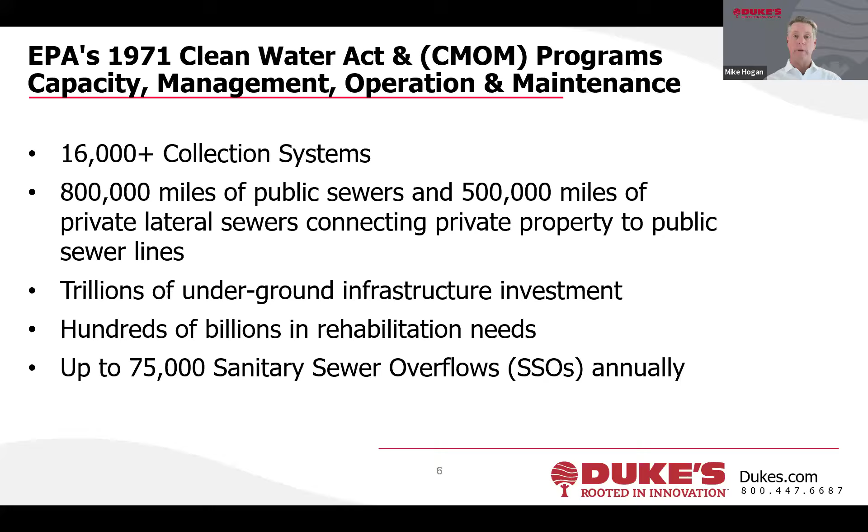And mostly, the CMOM program addresses the 75,000 sanitary sewer overflows that we experience annually in this country. And I'm going to touch on that a little bit on this next slide. And the reason why the SSOs are what the EPA and the state associations are really going after is when we have an overflow, it's a threat to our nation's public waterways and our public health. And again, prior to the 70s, our rivers and streams in this country were in dire straits, and we've reversed that. And it's because of these programs. But SSOs still happen at a rate of 75,000 a year.

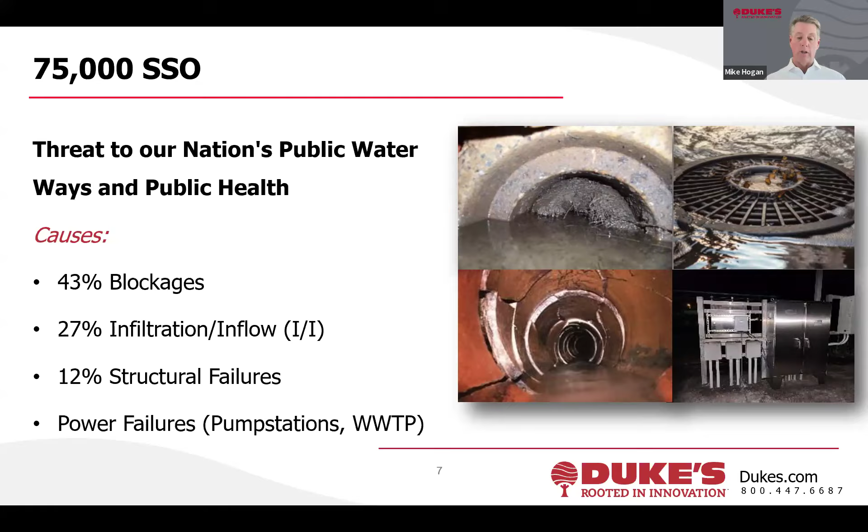And 43% of them are caused by blockages, like this slide here, where we're showing roots blocking the line. We've got 27% infiltration and inflow, groundwater and rainwater infiltrating, causing stoppages. Then there are structural failures of the pipe, where the pipe has collapsed and failed like this one. Ultimately, it may cave in and cause a blockage or an SSO. The others are power failures and some others, but we're going to key in on the 43% by blockages, and that's primarily roots and grease. Debris and collapsed pipe are a part of it, but mostly it's the grease and the roots. And this is by surveys done by the EPA.

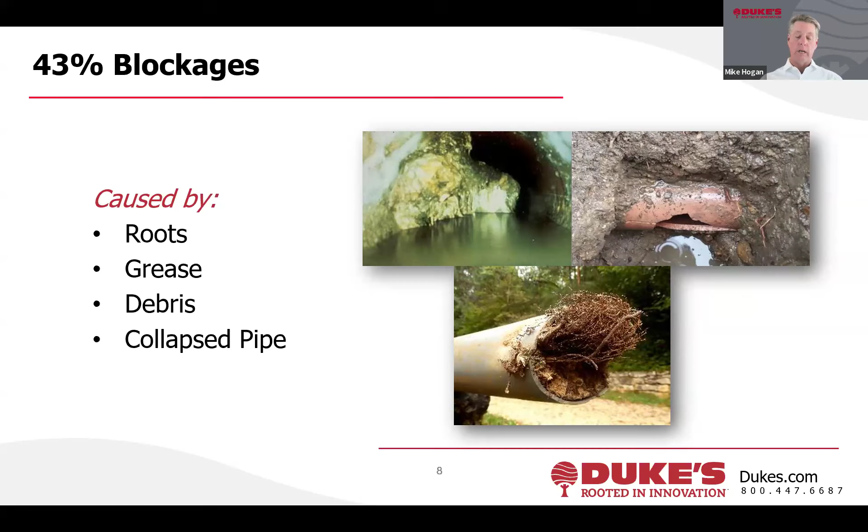Again, here we've got a massive blockage, and this blockage is built up of roots, grease, debris, everything that's collected on it. Flow's still able to get around it, but ultimately that won't be the case. We've got collapsed pipe here to the right, and down below here we're just showing how much these roots can grow once they're inside our sewers. We'll get into that a little bit more later as well.

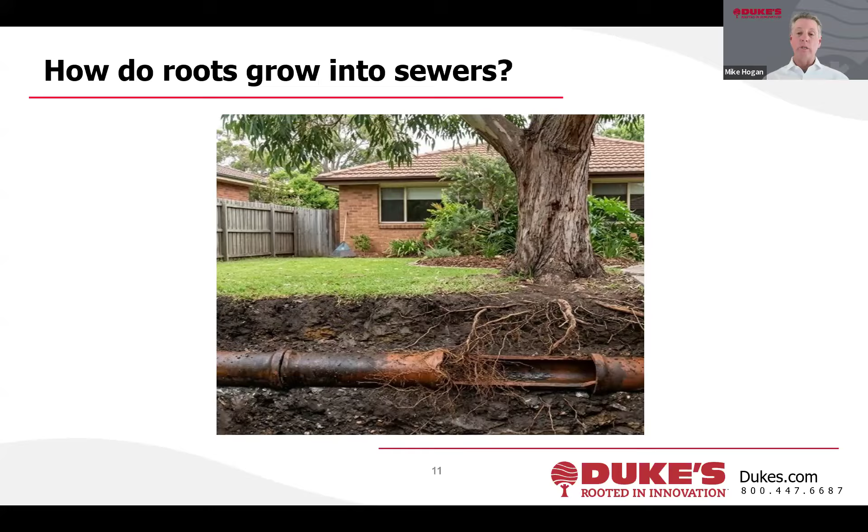Also, think about this. I introduced the idea of an anchor. Well, of course, the root is the anchor to the tree. And if we get a heavy windstorm or high wind situation, you're going to have this tree swaying. And when this tree sways, these roots move. When these roots move, they pull on this pipe, and that in itself can create openings for the roots to get into. So again, it's not what's in the pipe that's attractive to it initially, it's what's on the outside, but they always do seem to find their way to our sewer pipes.

You've got oxygen and you've got unrestricted growing space. So it's the perfect environment for roots to thrive. And as I said, you've got the compacted soils and everything that it works its way down through to get to our pipe. But once it gets in there, you've got this explosive growth that can occur because of all these benefits to the root mass.

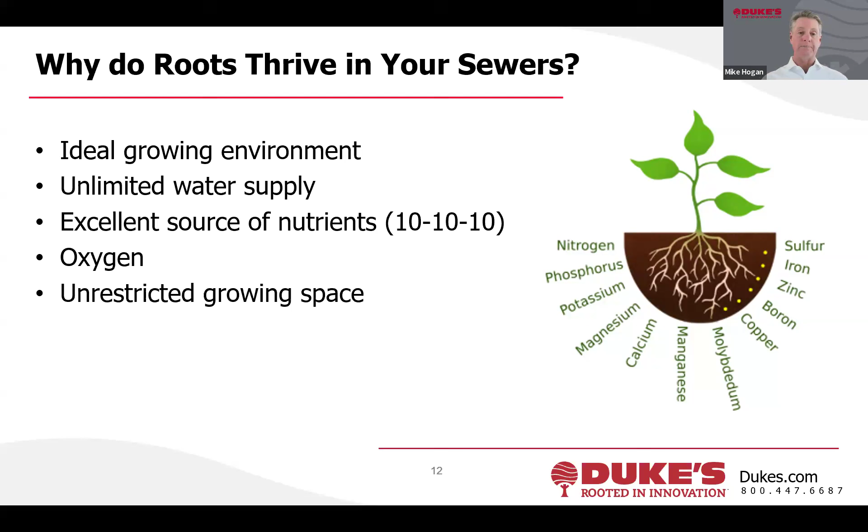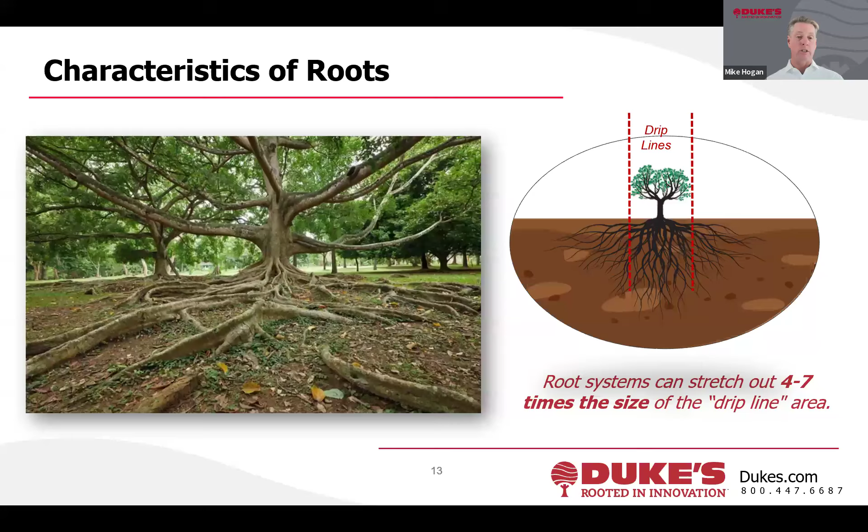So what happens is these roots grow 4 to 7 times the drip line of the tree. And in our situation where we've installed sewers down the middle of the street, we often wonder how roots get all the way out there, but this is why they get there. They're going to actively seek out the nutrients and moisture that they need for survival. Again, it's an unintended consequence of our actions, but we are contributing to the problem.

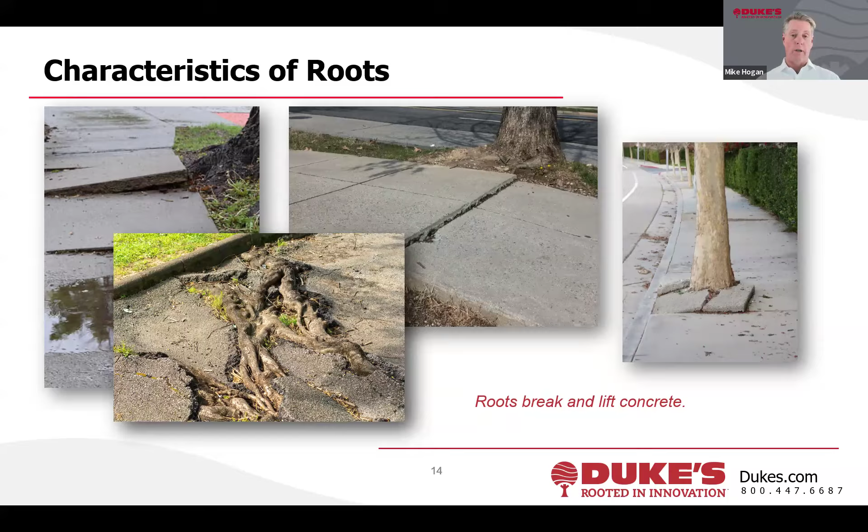Once the roots get to your sewer pipe and get through it and into it, that growth is still happening at that point of entry, and that's where the destruction happens. So whenever a council member or someone talks to me about, "Well, I don't really see what's going on down there," this is one way to point out to them what is happening.

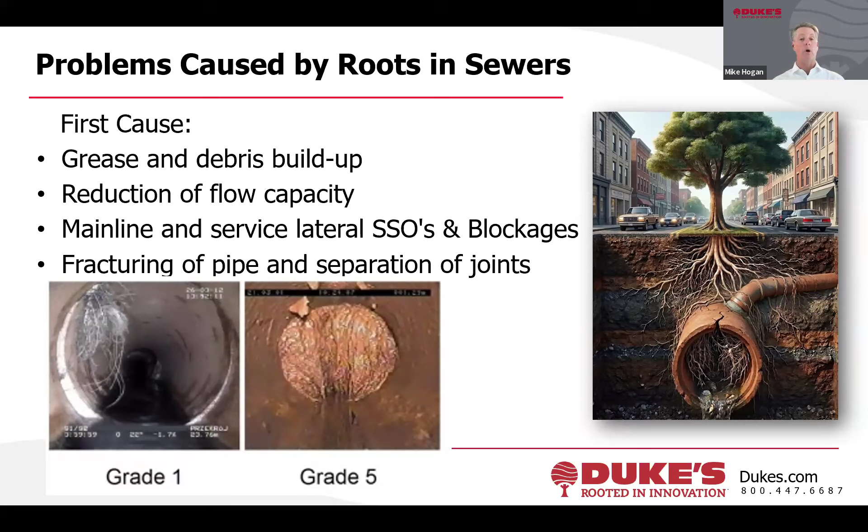And he's right. And he explained to me, sewers are designed to flow hydraulically at a certain rate to move solids through into the wastewater treatment plant. But when roots grow in the line, slow down the flow, what starts to happen? Debris starts to settle out. As that debris starts to settle out, the flow levels come up. When the flow levels come up, they get in contact with the roots. Roots aren't aquatic. They aren't growing down in the flow line.

They're up above it. But as the flows kick up and down with peak time, peak demand, stormwater entry, the roots facilitate more grease getting collected. And ultimately it becomes this big blockage. And there's very little root mass there, most probably, but it's a huge potential problem for us. So roots are the first cause for grease and debris buildup, reduction of flow capacity, ultimately leading to the SSOs and the blockages. And over here on the right, you're seeing this tree illustrating the roots growing down to our pipe. It's got into the joints, and ultimately it will crack and fracture the pipe, as I've mentioned.

So what is the role of root control as the foundation of a comprehensive preventive maintenance program? And when I talk about root control, preventive maintenance, and comprehensive preventive maintenance, comprehensive is your overall approach. Root control is just one of the tools necessary to have an effective, comprehensive program. So what are we going to do about these? What have we been doing? What are we going to do? Well, we've had mechanical methods to deal with it. We've got rehabilitation methods to deal with it. And we've got chemical, herbicidal, our particular Duke's method of dealing with roots. So there are options out there. And all of these are important and useful tools if you truly have a comprehensive program.

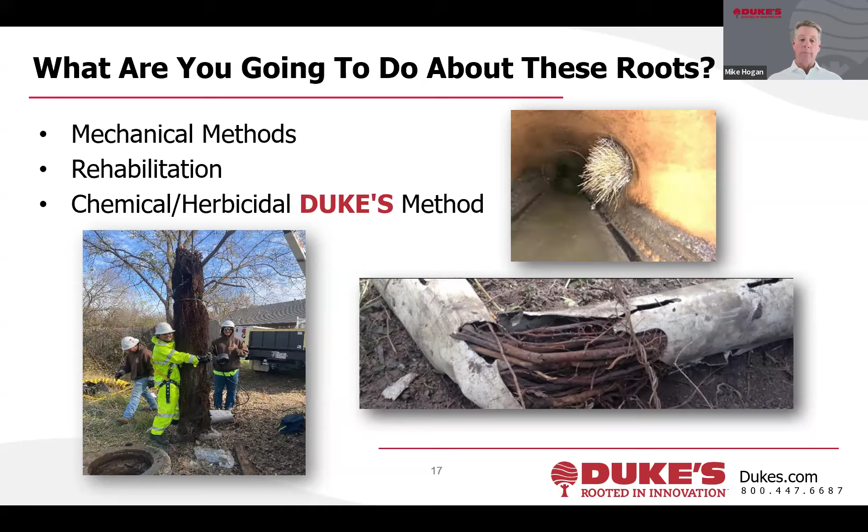The mechanical methods that we use today, everybody knows that there's rodding machines, bucket machines available to you. These particular pieces of equipment utilize tools like this, what they call a porcupine or an auger bit or a cutter. And they use basically brute force with cable and winch systems to pull these tools through the pipe, grabbing onto the root and tugging basically as hard as they can to rip the roots out. It's effective at removing root masses, but it can also be very destructive to the pipe material. It doesn't take a lot of pressure to pull in a pipe with these kinds of tools.

More recently, the last 30, 40 years, most cities are using hydraulic cleaners, jet trucks. And the nozzle technology that's available to us today is exceptional. There are some great nozzle technologies out there that will get that pipe clean. They will cut the roots out. They will pressure wash the roots out, whatever method they're using, spinning chains at high rates of speed, they will clean the roots out. And it's effective at doing that.

And you need it because when you have an emergency, if a line were to plug up today after this call, you're going to need to send a piece of equipment out there that can deal with it now, get that pipe open. Chemical root control doesn't do that. Chemical root control is the long-term approach. But for the emergency repair, you need these mechanical methods to do that.

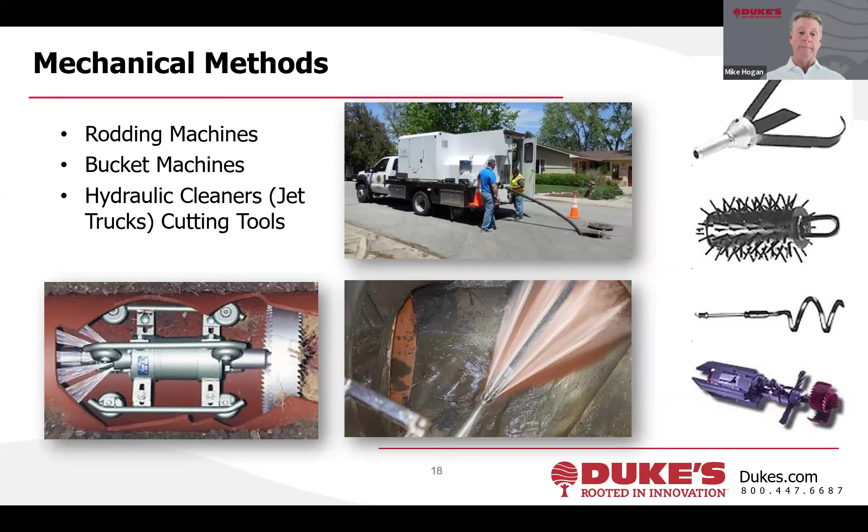But the true result of these mechanical methods is no different than what the utility company does when they drive out and cut down the trees that are growing up into their power lines. We often see it. You'll see they'll just cut these trees back to nothing. And this is what it looks like shortly after happening. But if you came back in a year, you're going to see multiple new shoots coming out of every one of these cuts. That's the reality.

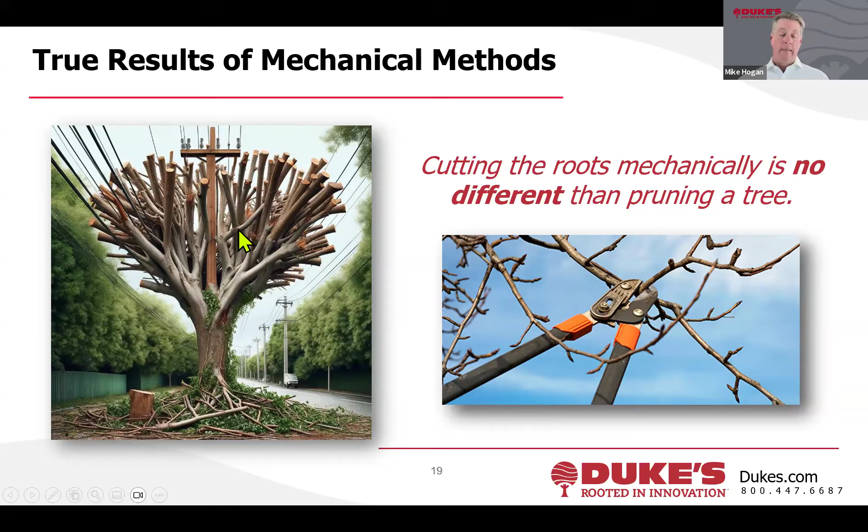In fact, it's what we do in our yards. A lot of us have vegetation in our yards that we trim and manicure to have it look good. And if you notice, every time you cut it, if you look at the base of that bush or that tree that you're trimming, it's getting thicker and larger every time you do it. And that same effect is happening in our pipes with the cutting and pruning that we're doing.

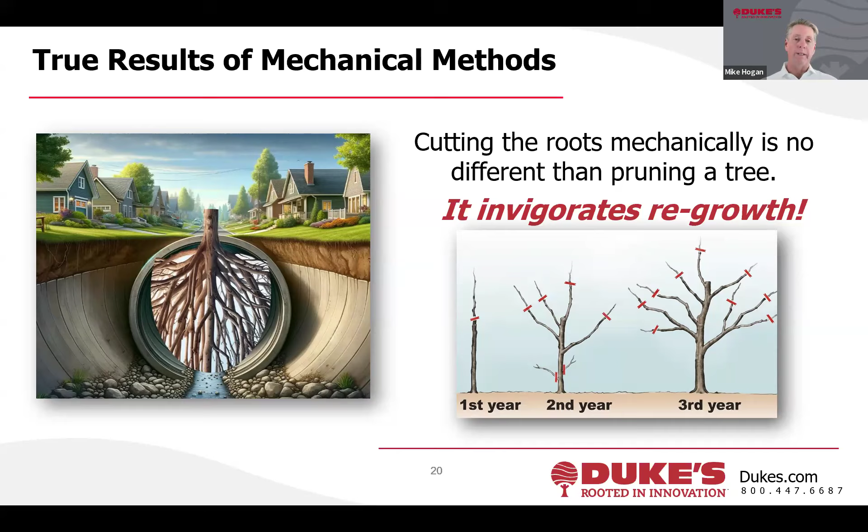But if the pipe has structurally failed, this is what you would need to do. That would be a part of your comprehensive program. Replace the line if structurally the pipe has failed. But if all it is is a root problem that's in the line, then there's no need to go to this extreme. We can CIPP it, cured in place pipe. Again, great way to get rid of roots in the lines. You got one continuous sleeve going through a pipe. You eliminate the points of entry through the 4-foot, 5-foot joints that we saw in the clay pipe.

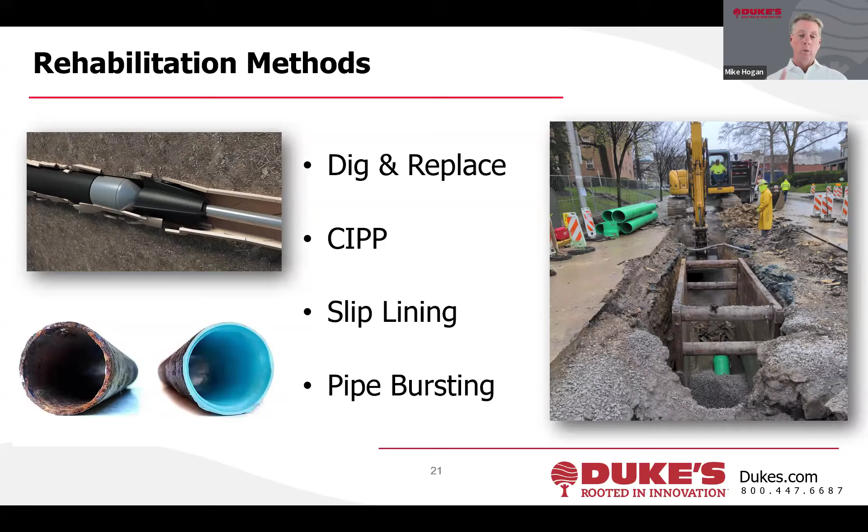Very effective. But it does lead to a problem in that the connections, unless you line those connections 5-10 feet up the services, the roots are going to be right there where the pipe was lined and the connections are tied in. And roots are going to still be able to enter at that point. And we have lots of clients where we actually treat cured in place pipe because of roots coming in at the service connections. There's slip lining and pipe bursting available to you as well. Again, it's a way to renew the pipe, but it's not a cost-effective way of dealing with root control, but necessary when the structural integrity has failed.

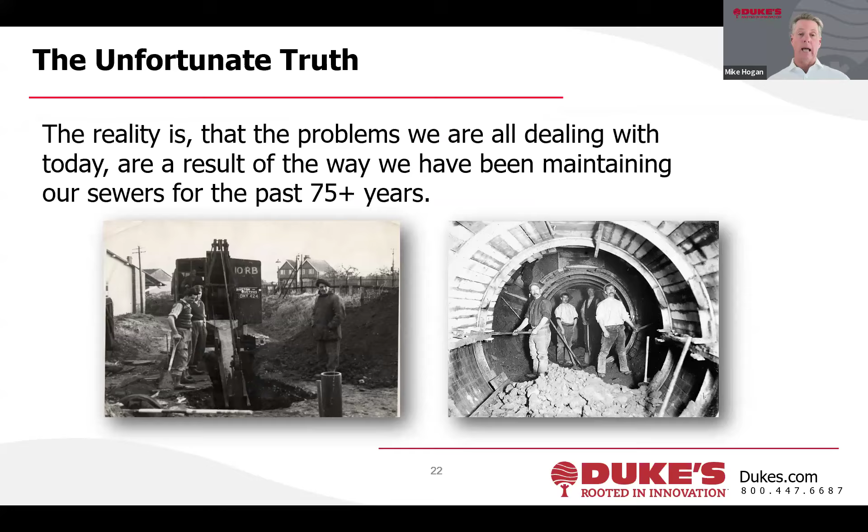So the unfortunate truth here is that the problems we are dealing with today are the result of the way we have been maintaining our sewers for the past 75 years. We just haven't done the best job available in maintaining our sewers to try to maximize that life. We're often reactive, and we're going to get into that. So the mechanical and rehabilitation methods are difficult. They're destructive, potentially very destructive. They are very expensive and costly, and they're reactive.

In all these situations, you're utilizing these pieces of equipment to react to our failure of the past. Or you're reacting to an emergency call, which in that situation, it's necessary. But to just deal with roots with these pieces of equipment, you will not have a successful, comprehensive root control program. So what's another way? We're here to talk about adding chemical root control to your comprehensive plan. And we're going to show you why it's supported with lots of data demonstrating its effectiveness and why it's proactive versus reactive.

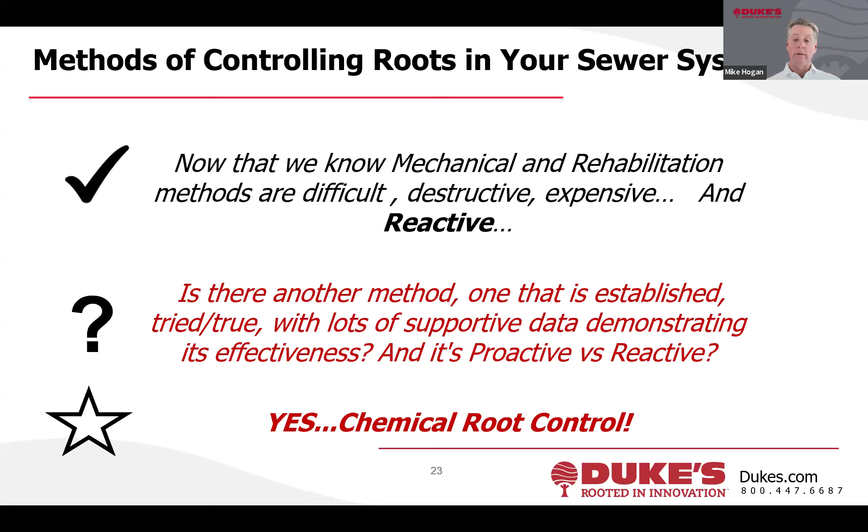Quickly, I'd just like to explain the application process, and it's not complicated, folks. We have a lightweight piece of equipment that houses all of our foam generation equipment, every tool necessary to do lines that are highway, street lines, backyard easements, narrow alleys, you name it. We've often said if we can't get to it, it can't be done, because we have the capability also of pulling hoses into backyards. But the process is simple. Crew rolls up on the manhole.

We insert this 1 inch plastic water service hose through the entire length of the pipe in almost every case. If we can't get all the way through, it's possible that we can treat from both sides. So we don't only have to go one direction, we can go both ways. And we can treat any pipe from 4 inch house laterals. We can go in at the connections with a little different modification to this piece of equipment and pump foam through the clean out down to the main.

But primarily we treat 6 inch to, I'd say, 15 to 18 inches, 90% of the 25, 30 million feet we do a year. But we are capable of doing pipe diameters up to 96 inch. We do a lot of 24 outfall, 36 outfall, but we have done up to 96 inch pipe. And we've done it all with this one piece of equipment. So it's very versatile, allows us to get around the country cost effectively and be able to do any job in any city that we pull up to. So, again, simple process.

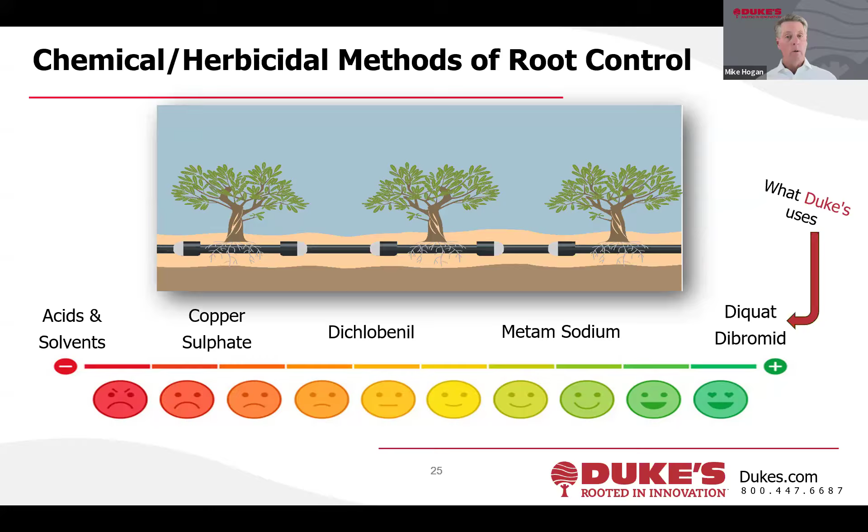So Duke's chemical root control program specifically, what makes us expert? One, I talked about our longevity in the industry. We've been specializing in root control for 47 plus years. And over that time, our techniques have developed to be expert. Our products that we use are expert, and I'm going to go into those. And we're utilizing, as I said, the best herbicide technology available today with diquat dibromide.

We know when applied properly, it's safe for wastewater treatment plants. We do, as I said, millions and millions of feet a year. We have procedures in place that we check with the municipal wastewater treatment plant before any treatments are done. We notify them of our application rates, where we'll be working. We stay in close contact with them to make sure and ensure that there aren't any problems at the wastewater treatment plants.

We know that these products will not harm the above ground vegetation. They aren't designed to translocate up and into the tree. They're only going to kill the small amount of root that they come in contact with in the pipe, and it will only translocate, we're hoping, 5 to 10 inches outside the pipe. That 5 to 10 inches outside the pipe is important.

I want to go back here and show you. As this root's growing down, those pieces of mechanical equipment tools that we talked about do an excellent job at removing the roots that are right here in this pipe. But they're not doing anything to these roots outside here. The best operator in the world can get you what I would call a rifle barrel sewer clean.

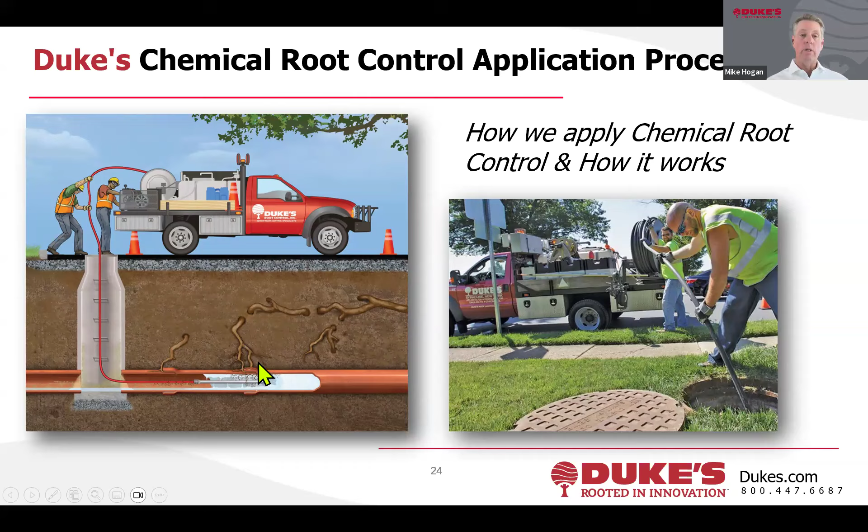And we hope, and it depends on the amount of volume of root that is encasing the pipe, we hope to get 5 to 10 inches outside the pipe on a first application and further than that on a second application. And that in itself is what allows us to guarantee that the lines aren't going to have any backups or stoppages for a period of 2 to 3 years. It's due to the nature of how far outside the pipe we kill these roots.

That foam quality is very important to us because it's the bubbles in the foam, and actually it's the space between the bubbles that carries the herbicide up into the top of the pipe and gives us the necessary contact time to kill the roots, which is about an hour. We don't need much more than an hour. Often you'll see this foam stand up in a pipe for 24 hours and sometimes more.

Eventually it'll dissipate, return to fluid. The fluid will enter into the flow. The flow goes to the treatment plant. As I said, we've already notified them. They know what to expect and there will be no harmful effects at the treatment plant.

Roots aren't aquatic. As I mentioned, they aren't growing down here. If this were flow in this pipe, it'd be at about this level. If you're using any type of pour down products, you're not getting up here, which is where the roots are, which is why these foaming technologies are so important.

Additionally, we incorporate emulsifiers and degreasers into the foaming agent so that we strip off that grease and debris muck buildup that I showed you earlier. We get that off of the roots so that we can get more absorption of our herbicide up into the root. So it's a combination of all these that make that effective.

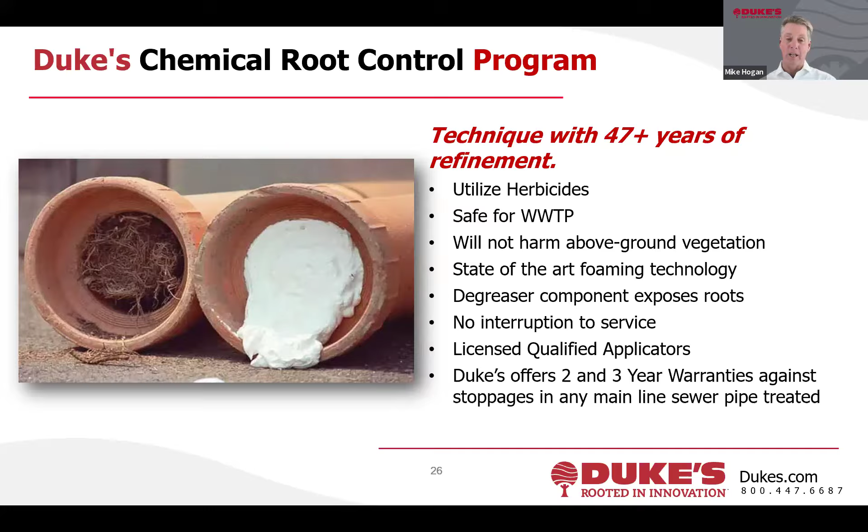And lastly, I mentioned that Duke's offers a 2 to 3 year warranty against stoppages on any lines we treat. Again, indicative of how far outside the pipe we get. But when you instill a chemical root control program that kills the roots today, kills them outside the pipe, and then you maintain that program every 3 years, we can eliminate roots permanently and guaranteed. And I'm going to show you that in some of these results.

What you can expect if you bring Duke's in to help you with a root control problem, expectations are these. We know through tracking every line we've ever treated and what percentage we get a callback on, that we're going to be 90 to 99% effective on a first time treatment.

And if you apply a second time 2 years later, then at that point we're going to guarantee it for 3 years. And the reason we increase from 2 to 3 is because on that second treatment, we're getting much further translocation outside the pipe, therefore preventing new growth from coming back in as fast as it would with other methods. We know we can go even further outside and therefore guarantee it for 3 years.

And our success rate on second applications gets into the 95 to 99%. I don't ever want to say 100, but most of our customers experience that type of level of success at 100%.

What that does for you, if we're reducing all these root-related problems, it's going to reduce your need to send out crews to deal with them. And often we're dealing with these stoppages on evenings and weekends and holidays, and you will see a reduction in overtime expenses if that's your priority.

We're going to significantly increase the effectiveness of your in-house work, your in-house scheduled maintenance. You guys have lots of equipment designed to go out and clean the grease spots or the hot spots, we may call them. And if we're dealing with your root problems for you, and we can reduce you having to send crews out to maintenance or cut or clean out root-related problems, imagine the resources that'll free up for you, the equipment and the time available for you to do more cost-effective things that you do in-house when we're focusing on your roots for you.

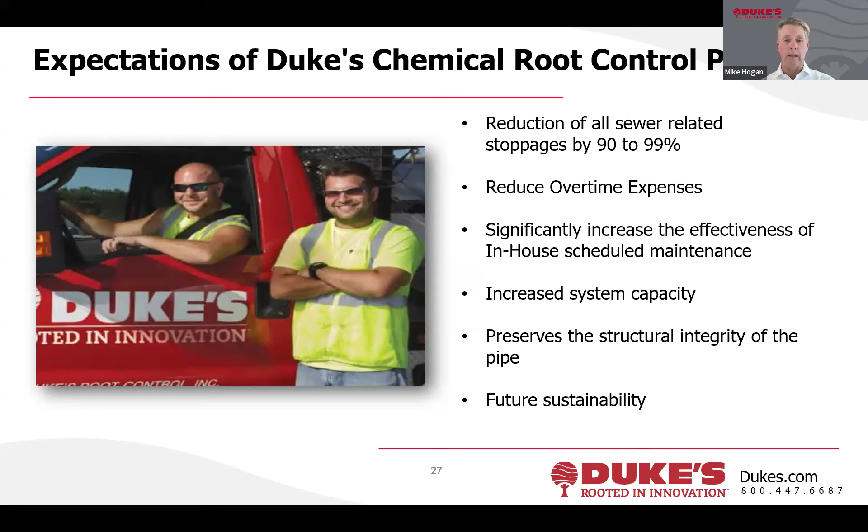And last and most importantly, I've talked about it, you got two responsibilities: keep it in the sewer and preserve the life of the pipe. And we know for fact that when you utilize chemical root control that gets outside the pipe and kills those roots, the structural integrity of that pipe will be sound from the day we initially treat it and for as long as you keep and maintain your root control program going, giving you future sustainability of your whole system. The most cost-effective thing you can do for your municipality is to save that pipe, maximize the life of that pipe. Couple simple case studies.

I've got a city that I was involved with in the Carolinas 35 years ago that I went in to meet. They had lines scheduled to be dug up and replaced because of roots. I said, before you do that, just give me one shot. Let me treat these lines for you and let's see what happens. And I can tell you 35 years later, those lines are still in service, still operating. The structural integrity hasn't decreased one bit from 35 years ago. That's what I'm talking about when I mentioned we can save your pipe. Imagine what that dig up project could have cost them. Back then, I think we were charging $1.29 a foot for root control. They got a lot of years of treatment by not having to dig up that pipe.

Another city in the Midwest, we've been treating since the early 2000s. They've deemed it one of their most important maintenance items, resulting in a huge reduction of their SSOs, their data showing a 99% success rate. And it's allowed them, as I kind of mentioned earlier, to systematically plan to get around their system. Some people call it turn their system, maintenance. You may be required to clean it every 7 years, TV it every 10 years, or vice versa. But it's helped them to be more efficient at doing what they need to do while we're handling their root problem for them. And lastly, this is kind of an interesting one.

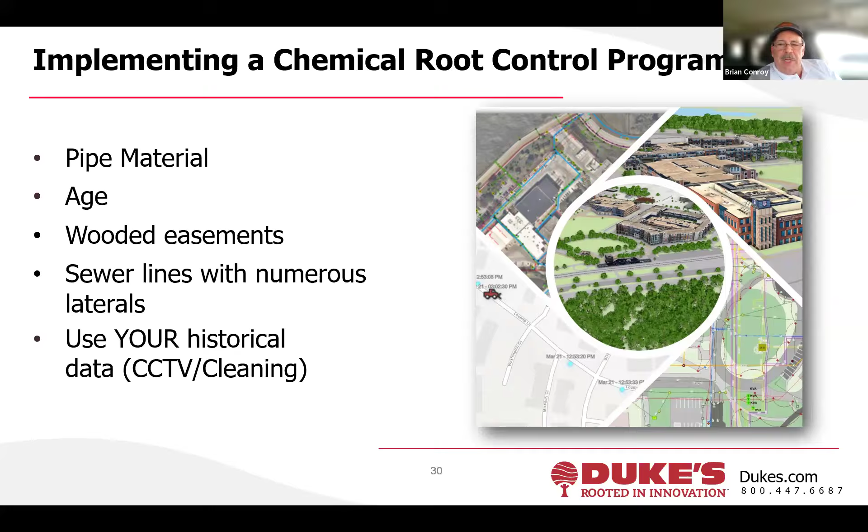And then we recommend you plot it onto your GIS system. So if you're utilizing GIS, you could share your shapefile information with us. We can plot it on our project platform, and we can actually put all that data on the map for you as well. And now you can have a visual appearance of where your root problems are in your collection system and make a targeted approach, how you can budget the right amount of money to attack your problem in a way that you can afford.

And still there are many of our clients that don't utilize GIS, they're still using paper maps, but it is important to plot that information on some type of mapping program so the work can be done effectively and efficiently. And of course, that's one of the tremendous benefits of utilizing Dukes. If you could go back one slide, please.

Is maintaining records of the treatments. So if you're going to be managing a program like chemical root control, it's going to be a multi-year program. You're going to want to get onto a 3-year cycle. And again, one of the benefits of partnering with Dukes is we take it on to be the managers of that program for you. We're going to keep track of where you've been treating your pipes. We're going to meet with you once a year, present to you your annual chemical root control program report.

It consists of both a statistical overview of the success of your program. In fact, Mike did a great job of pointing out success rate. At our last business meeting that we had in December, our company leadership announced that 99.6% of the pipes that we treated in the history of Dukes have not plugged up under guarantee due to roots. And so we do that statistical success rate for each and every individual client when we meet with you at least once a year to go over it.

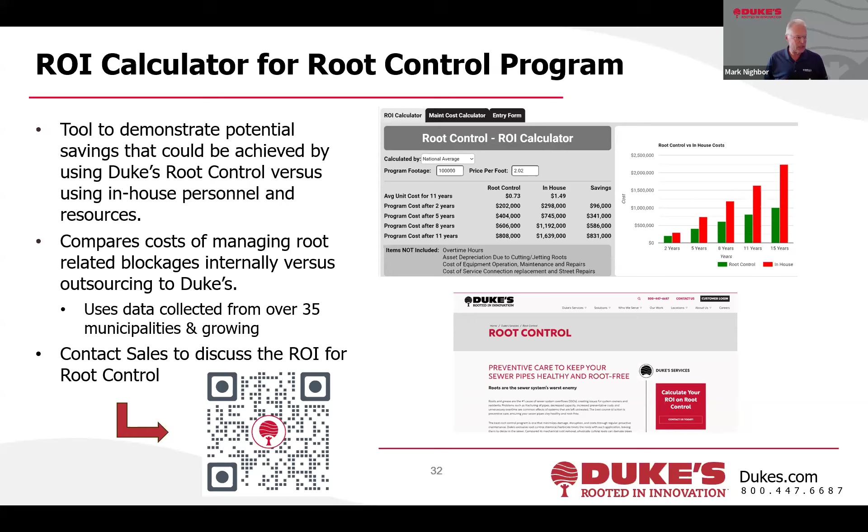And I'll just add in what Brian alluded to. If you go to that site, you're going to be able to see some examples of a small, medium, and large collection system as far as what their ROI is. And if you want to get more detailed, you can once again, as Brian said, get in touch with our sales folks, and they'll go through one with you using your numbers. But that'll be a commitment on your behalf. But the examples are there for you to take a look at. And once again, Brian, thanks for sharing that.

I want to wrap up before we get to Q&A to make sure, although most of what we talked about today was associated with root control, we also provide services that can help you with other projects, be that CCTV and cleaning, helping you find I&I in the form of doing micro detection, flow monitoring, also pump station monitoring, and then any assistance you need with potential acoustics inspection, smoke and dye testing, and also any projects you have for manhole inspections, and then also additional capabilities for helping you locate and inspect potential crossbores, and then a non-invasive way of doing excavation. Okay. So we have other services. Once again, reach out to us and we can talk about it.

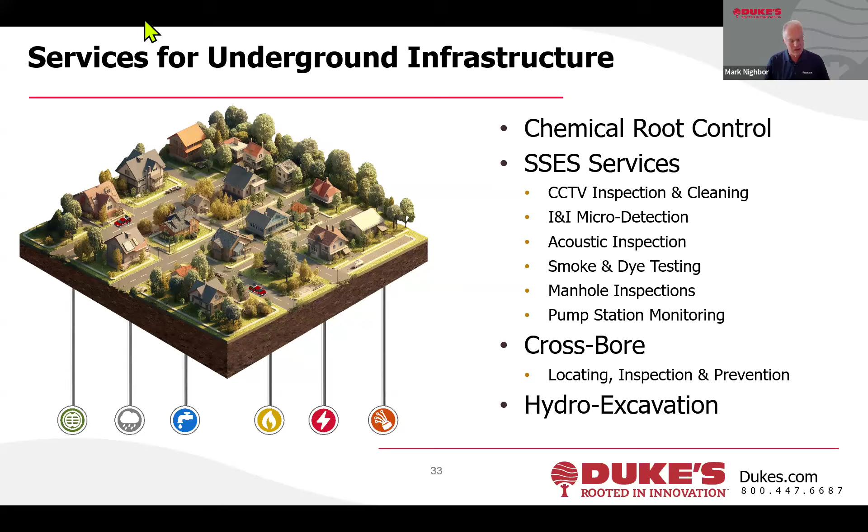And with that, what I would like to do is go through some of the questions. Let me start with the first question, Brian and Mike. What's the best timing for herbicide application? Is effectiveness reduced if timing is too early in the spring before bud break?

Brian, I can take that one. Go for it. Well, there was a study done by Furman University back in the 70s that wanted to determine exactly that. And what was discovered was that there's no difference in the growth underground during the dormant times of the years. It was so minuscule, the difference in the translocation of the products, that it was determined by that particular client who had that concern, when should we best do our treatments? And it made no difference.

And we've proven that over our 47 years. We've worked across the country. Inevitably, it seems like we're in Maine in January and Florida in August. So, no detrimental effects as a result of treating in the winter. So the herbicides will still do what they need to do to kill the roots in the sewer, even when the tree is dormant.